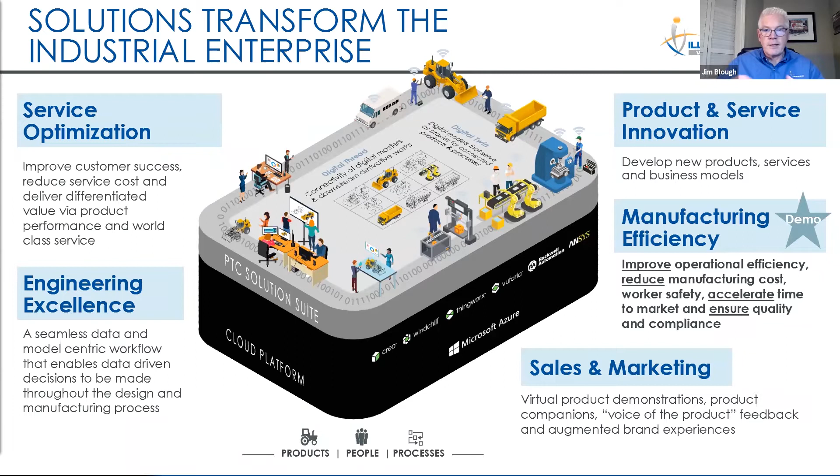So if we look in today's environment, whether it be in a factory, a lab, or a facility, we have some common challenges. On the data side, right, we lack the visibility of operational information or machine data. I don't have that available to me, and I can't really see it. And sometimes it's because machines aren't connected, or if they are, I can't share it. Which leads me to the next point, is that I don't have the ability to aggregate it. Thus, I can't analyze it. I can't visualize that information.

And because of that, reports delivered to organizations are typically looking backwards. They're delivered after the fact. I don't look ahead and see what things I can do for my environment. Looking ahead, what I do is look a lot of times at what has occurred in the past.

I have challenges from an infrastructure and IT standpoint. I have a lack of interoperability. This concept of having all these different systems and different pieces of equipment, and they don't work together. They stand very specific, very rigid. So I may have an application or system on my plant floor that doesn't communicate to my ERP system.

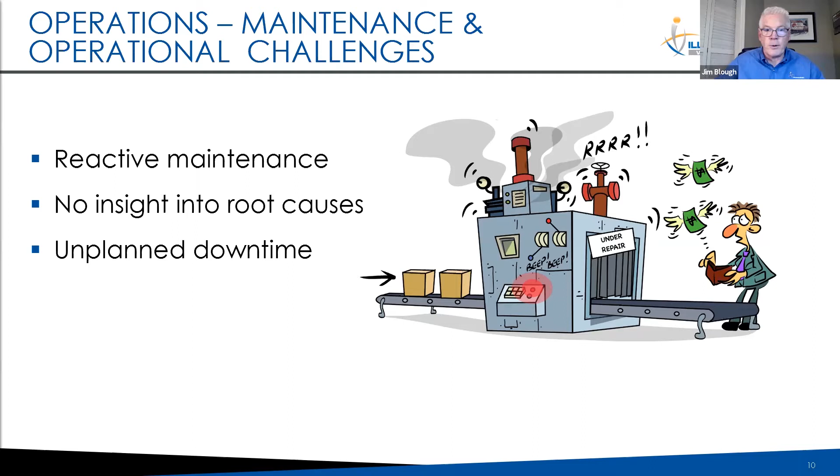So for Illumination Works, what we leverage as part of this was the IoT platform ThingWorx. This is from PTC, one of the leaders in this space out of Boston, Massachusetts. If we look at what ThingWorx can deliver, it's purpose built. It is built for an IoT environment. It has things you would want to have: connectivity, scalability, security. And then it allows for rapid deployment, rapid development, and extendability.

The idea is I can get something to value quickly. I can also go across all environments, whether that be on premises, in the cloud, or a hybrid of that. I also can provide a very engaging experience.

So this is where I can take, whether it be a dashboard that's presented to me, or I can extend that with an augmented reality experience. And then it exists in a vibrant ecosystem, with a lot of partners we work with and existing different systems. So the chances are there's some commonality between the systems in your organization and the support that ThingWorx can provide.

So what makes up ThingWorx and what are the parts we use today? From a connectivity standpoint, we look at Kepware, and you'll see John show us how that works and how we connected our factory. We then leverage a concept of a thing model. This is a tool to build really my IoT application.

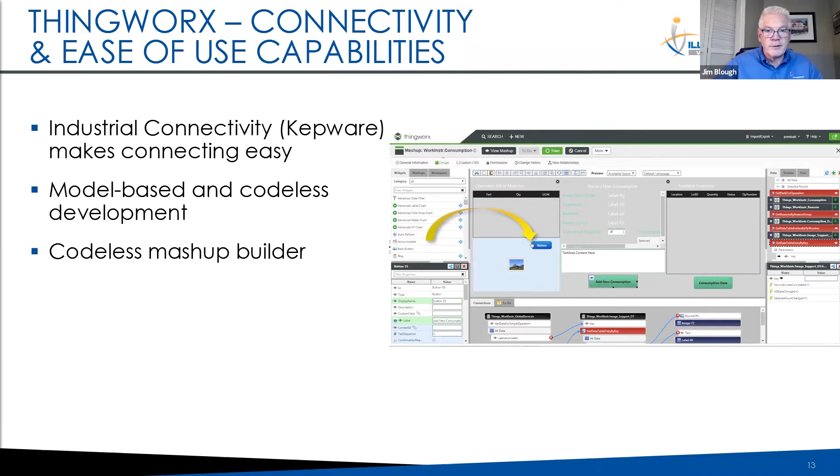I can also easily write rules and generate alerts that I can put as part of my application. And then lastly, from an infrastructure standpoint, I can integrate with systems, whether they be business systems, whether they be systems within a factory, and web services. So the idea is it easily integrates.

It provides a very unified view of various sources. So you're going to see all of these sources, and we can present that as part of each of our demos in a very unified fashion.

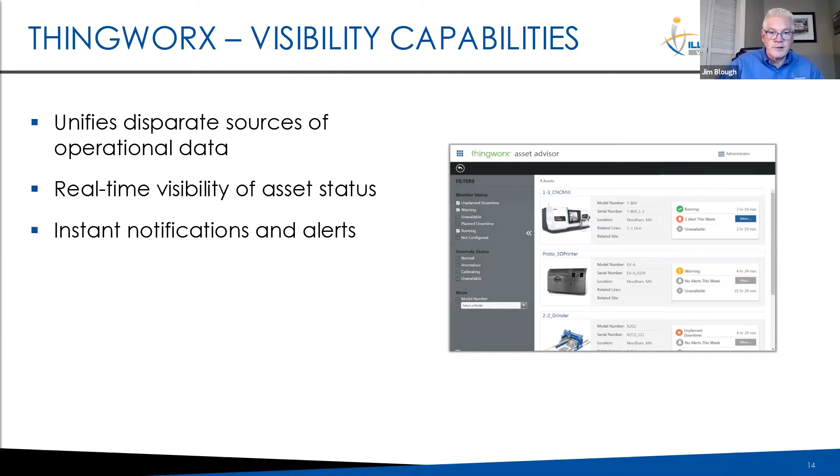And then being real time, you'll see both John and Stefan show the capability of real-time monitoring of the different assets that are available. So I can now start making timely decisions, and I can also look ahead. I also can, accompanied with that, get instant notifications of alerts. So if something is wrong, I will know now. I'm not going to know 10 minutes later, et cetera.

And you'll see, actually when Stefan does the paint hanger demo, he has different icons that come up and indicate if something is out of range in some of the different measurements that are occurring.

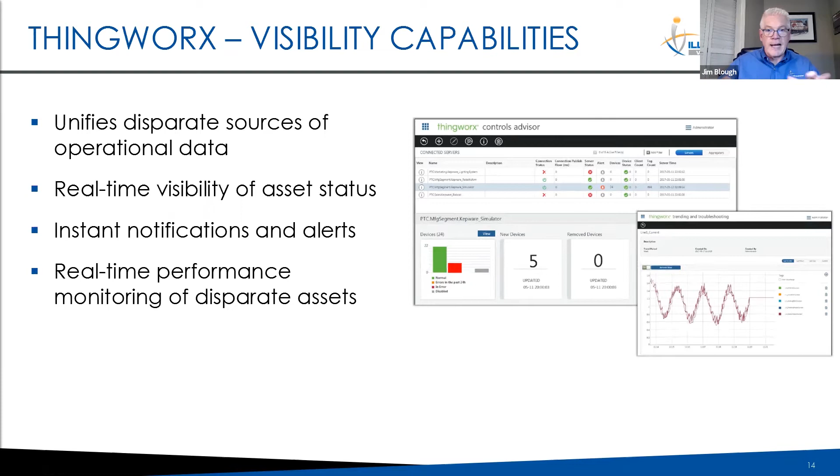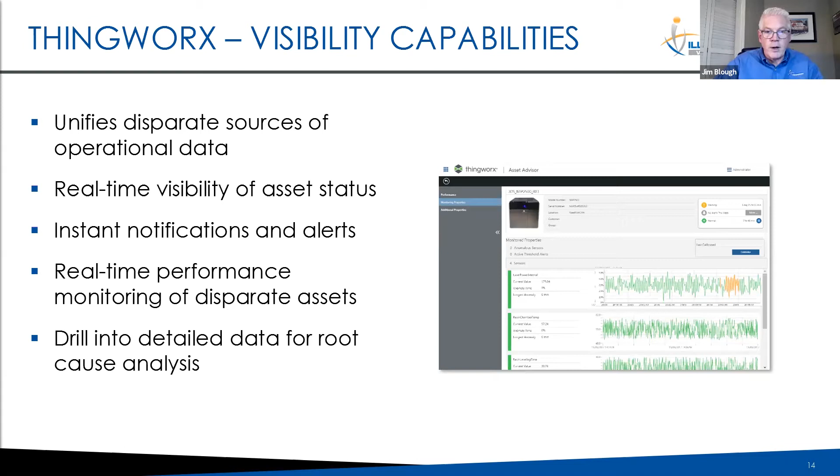I can provide and display that information in real time. I have all of the different assets, and you'll see in both demos a dashboard that has all that information available on a real-time basis. I also have the capability of drilling down, and John will show us that in the first demo especially, where I can drill down to determine the root cause of a problem or get more detail on what's going on within my operations.

From a development standpoint, ThingWorx is really made to develop faster and get quick time to value. Instead of having to develop it yourself using tools available in the industry today, this is really going to accelerate your development cycle.

As I mentioned before, we can create browser-based desktop and also mobile solutions. In our case, we're going to show 2 dashboards, but in the future we could extend that out by showing it on a phone or a tablet.

And I'll also be able to, because I now have the capability of looking at data real time across everything, start doing data analytics that allows me to do predictive and prescriptive type of analytics. We aren't going to show that today, but as we continue to grow these 2 scenarios, you're going to see some done in the analytics space.

And then finally, as I mentioned before, I have the capability with augmented reality, AR, to really integrate that. As you can imagine, it's trying to take what we've done and created and being able to view that in a very interactive type of experience. That's something we're going to be looking to add to our 2 demos in the near future.

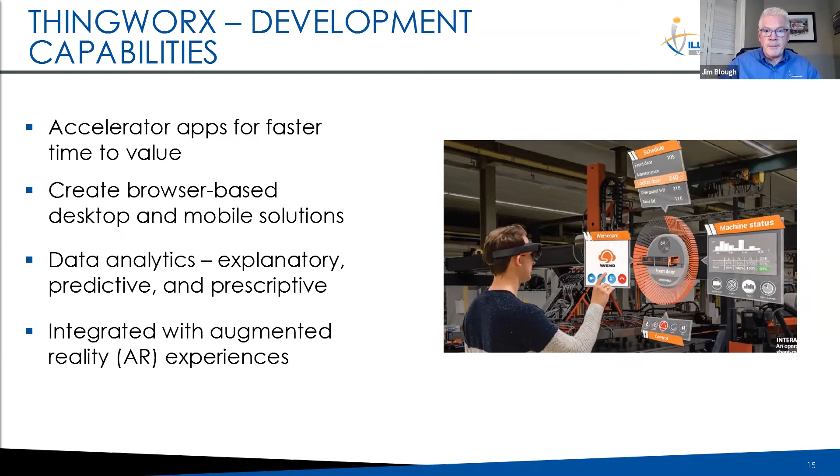So what is the value that's really delivered? We've touched on some of these, but let's summarize again. Proactive issue identification—I can do that. I'm not looking backwards, I'm looking forward.

I have more reliable data collection, so everything is brought into one place. I don't have multiple screens, I don't have information that I have to run over and look at on different systems. It's all collected in one central location. Thus I get increased efficiency, increased flexibility within the environment. With all of these connected devices, being able to view them and manage them in one location is very valuable to your organization.

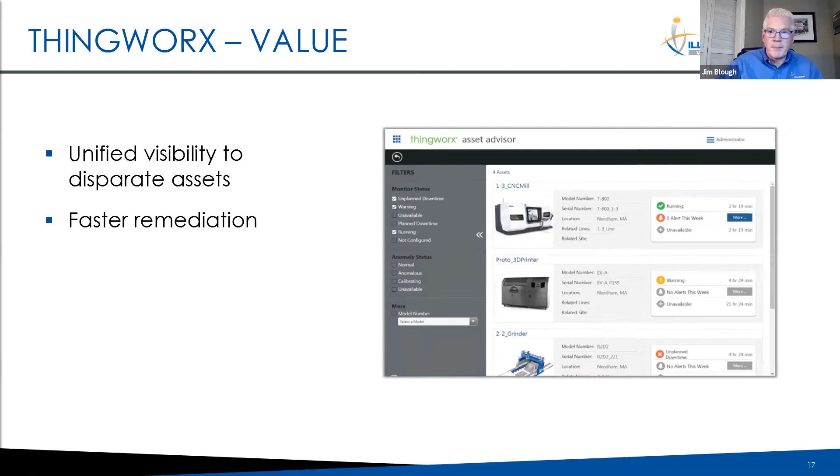As I continue to look at the value, there's unified visibility—I can see everything at one spot, and you'll see in both demos how that plays out. Faster remediation—I can look at it real time, then make my action quickly and effectively. And thus I reduce downtime, which is a key piece.

So if we bring these all together, this ties it all together—what does ThingWorx bring? It increases the efficiency, increases your responsiveness, improves the quality of your environment, and maximizes uptime of your pieces of equipment.

So we step back and look at the overall picture—what does an IoT platform like ThingWorx deliver to your organization? This maximizes revenue, or maximizes the capital you're going to spend on a piece of equipment or the environment.

How can I improve throughput, increase service levels, reduce cost? How can I lower labor costs? How can I reduce downtime? How can I make it more effective? Also, how can I provide a safe and compliant environment for the workers in my organization? And then increased efficiency—how can I improve the asset utilization for my company?

Both of these, which we're going to go through today, come out of our innovation lab. Our innovation lab is at Illumination's headquarters in Dayton, Ohio. The lab is really about taking the latest technologies, the leading tools available in the industry, and exploiting those to become more knowledgeable—for us and for our consultants—and then delivering solutions to our clients. Lately, the real focus for our company has been on AR, IoT, and data science, and we continue to grow those practices.

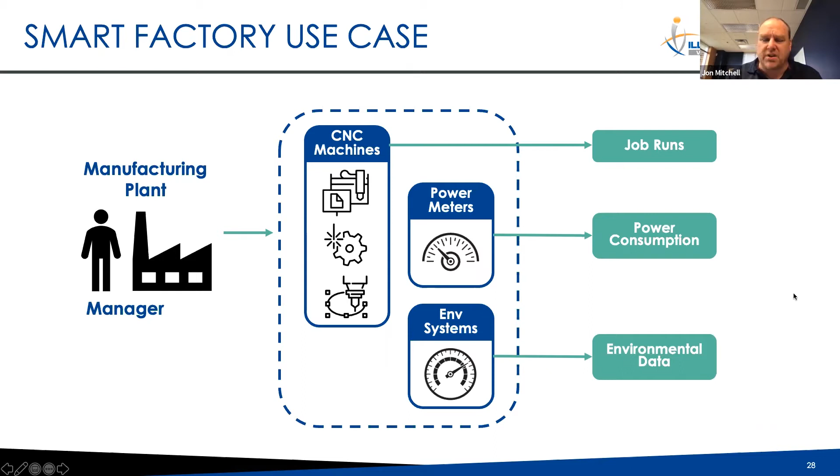In this particular example, we have a working micro HVAC system that we'll show in a little bit. But we really wanted to make this as realistic as possible. So with that, I'm going to flip over to the demo.

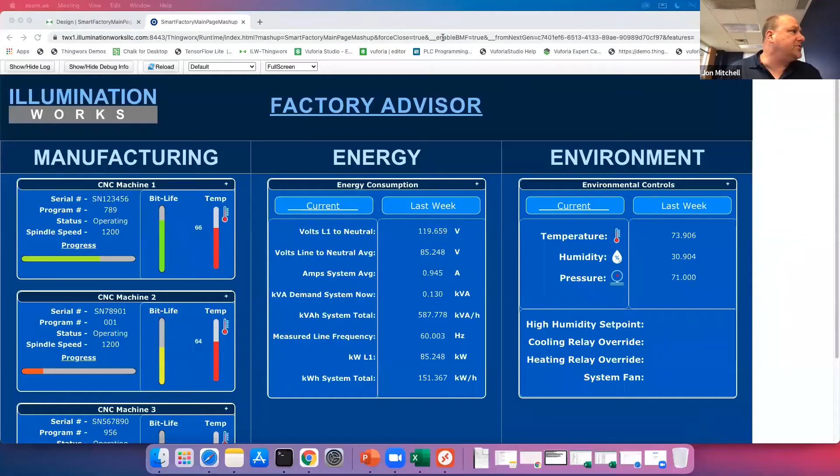Everybody see my web page okay here? Factory Advisor, Jim? Yeah, it looks good. Okay, yep, got it. So let me make sure I'm still logged in, not timed out.

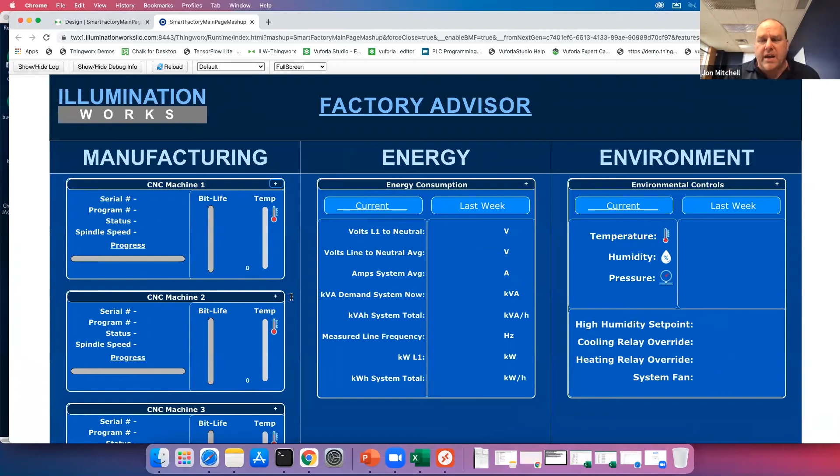There we go. So as this pulls up, from a design perspective, you can see, and this is our main entry point from an application perspective, we really have those three pillars or groupings of information. We have our manufacturing sector, and in here we have a number of micro pieces of CNC data, and these are your high points. These are your things that if I glance at this dashboard, what do I want to see?

So I'm looking at things like status. I'm looking at the program number. I care about the operating temperature. And then I've got this bit life indicator that is showing me the current tool loaded, what kind of expected life does it have. And then across this bottom here, I have progress bars.

In my center level, I have my energy consumption. So what am I currently doing? Obviously, pulling less than an amp here. We're not dealing with a lot of energy consumption, but these are live feeds coming off of a Dent Power Scout in our lab. So we're able to pull that data dynamically in and present that to you as a live feed.

We also have the ability to drill into trend information. So we have last week's data. So you're seeing a couple different points here. And I have the ability to really have these live graphs, although a little bit hard to read here. You're looking at timestamps. You're looking at the different data points that we're pulling off and we're passing through the system and pulling on there.

So eventually I could build a drill in. If I want to look at that particular data point at that particular time, I can make that active. For now, we're just showing it as a trend line, a time series line, so we can gauge some of those things. And from a high level visibility perspective, look at that.

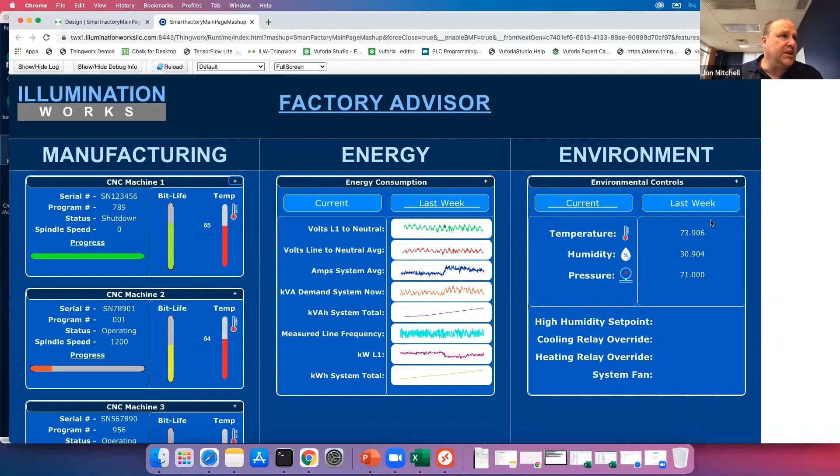We also have trend information. And as you can see, as we've cooled off here the last couple of days in Dayton, our humidity has dropped from a high point just a couple of days ago when we had a big storm come through. So for me, it's great to see that the demonstrations that we're doing are reflective in the environmental controls, which is something that you can influence.

But once again, same kind of construct. What is my push over time? How am I viewing that? We also have the ability to drill into more detailed pieces, and we're going to start on the environmental side.

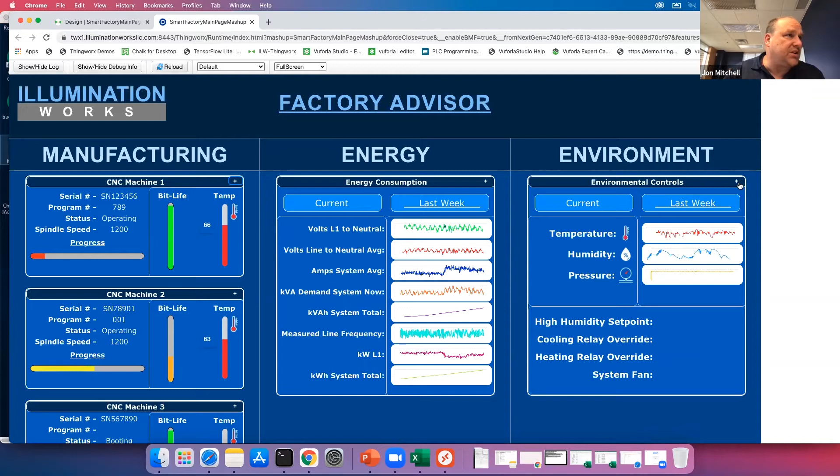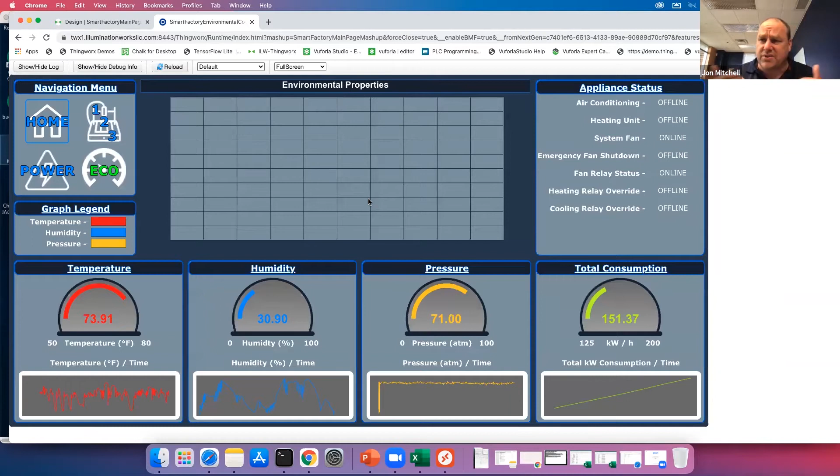So I'm going to open up this page, and this is going to be my drill-in. This is going to give me a lot more detail. This is going to give me a better visualize or an in-depth visualization of that. I also have things that drive my environment.

I have different statuses of different pieces of equipment. In this piece, I have the system fan, or for us, it's a ventilation activity. The fan is on, and that's because the relay is on. So I'm providing power to it, and I'm measuring that, yes, I'm actually turning, I'm getting RPMs.

So I also have the same kind of trend line over the last couple of days. As you can see, the humidity line is the one that kind of moves the most across the lab environment that we have. Up here, as you can see, we've moved to kind of this drill-in piece.

So I have some navigation that we've created. And the key thing to think about and take away is it's really flexible in terms of what you want this to look like, as plain vanilla or as branded or as colored as you want. We chose colors that we thought made sense.

And so, as we put this together, it looks like this, but it very easily could have a different look and feel.

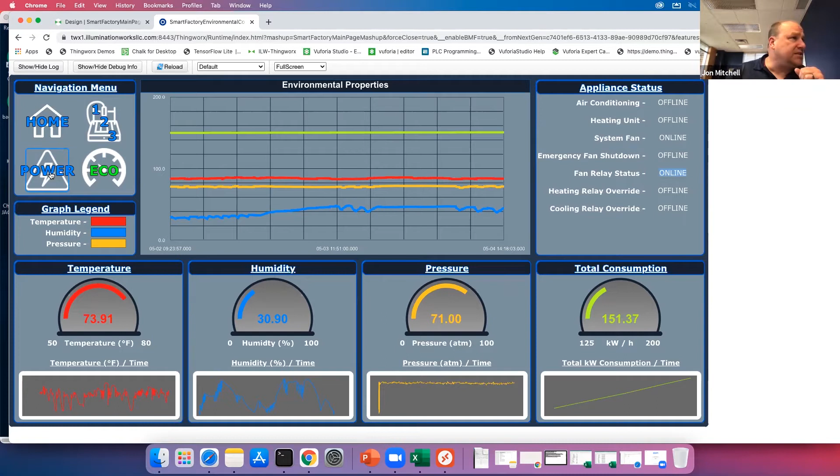So if I go into the power view, I see the different power systems. I have graph legend activity, this energy consumption graph. Take a second to load there. And these are pretty steady.

The system kind of just runs and turns on, so it's not overly exciting to look at this graph. But we do have some variances in amperage and some highs and lows in volts as different pieces of equipment are turned on and turned off, because the HVAC system is live. So as temperature thresholds are reached, we're actually spinning up heater controls and cooling systems to adjust that.

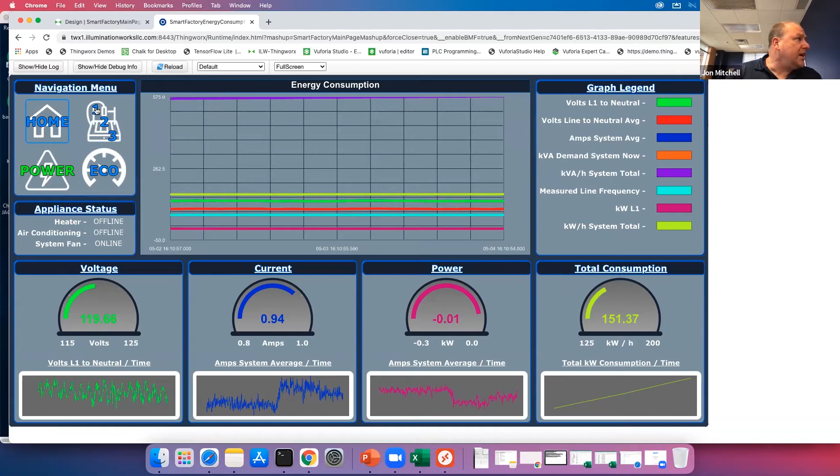From there, I'm going to start drilling into my manufacturing activity. And I could get to this page from that home page as well with those little plus boxes. But I'm going to be drilling into what is a simulated, specific job run. So same menu up here.

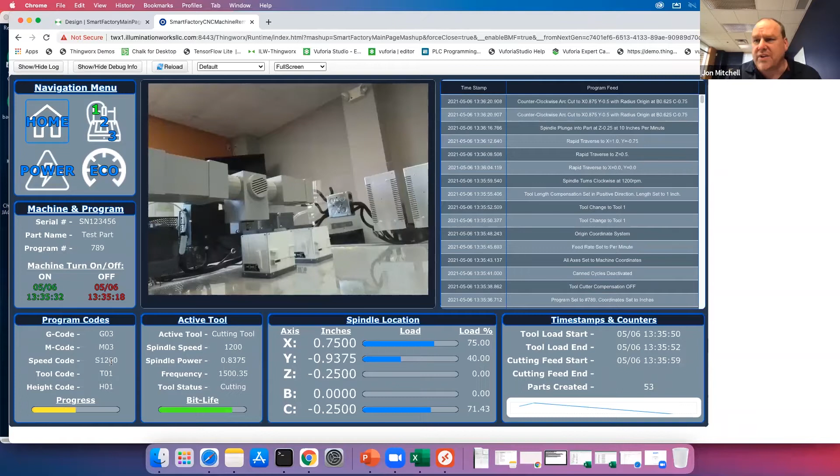I have general machine information. I'm looking at what is the program code. What are we trying to tell this machine to do? While this image right here is a video feed from just an overlook into our enclosure, what we're trying to simulate here or show is really any live stream video, live stream image.

We can integrate that data as well. So if I had a video camera, a LiDAR camera, or something else that's looking at a 3D print job, or any kind of feed, I could incorporate that visualization into my mashup, which is a UI in ThingWorx, and pull that data together.

Once again, same status locations, spindle locations. Some of these are graphic adaptions that we've done more from a visual perspective. An indicator line is typically a good way to show lifespan or lack thereof.

And then the other thing you're going to notice here in this top bucket, as the job runs, we're getting those status notices. So I'm getting a live feed from this simulation machine. And as I get those live updates into ThingWorx, I'm able to push those directly onto the user interface.

And we can drill into really any one of these machines. The video feed is going to be the same, but your program data in terms of what it's specifically doing are all going to be different.

So with that, that's the end of the demo. And the next piece, we're really going to talk about what we built, how we built it, and a little bit of the why we did some of the things we did. So I'm going to flip back over to my PowerPoint.

And go from there. So as we set back, we defined our use case. We looked at this and said, we have an understanding of the domain. We have an understanding of who our actors are. We have a general understanding of what kind of data we would be getting and seeing.

What are my building blocks? And so with ThingWorx, there are a set of pre-built applications. A factory advisor could be considered one of those pre-built configurable. There's a number that you can get directly from PTC or other partners, but they really are starting points for being able to configure or customize your own capability.

You can also start from scratch, which really speaks to the flexibility of the tool set. My use case may be something completely different, and the ability to rapidly build that user interface, which we'll show you here in a little bit, is really one of the big strengths of the platform.

We wanted to highlight connectors, and by connectors, we're really talking about what all kinds of ways can I access data, and ultimately every one of them being access data securely. But maybe I'm accessing control systems. Maybe I'm accessing an embedded system. Maybe I need to connect to a database because it's got information that I care about in the context of other information. And the ability to pull all that data together in a single location through all these connectors is another strength.

I'm going to create a model, and I'm going to create a model based on the business or the operation that I'm doing. So in our construct, I have a thing called a CNC machine. And that is an object or a thing in the model, and I'm going to associate all the data to that model. And what that allows us to do is make it very simple and easy to understand not only the data we're collecting, but how it's organized. We're going to apply business logic.

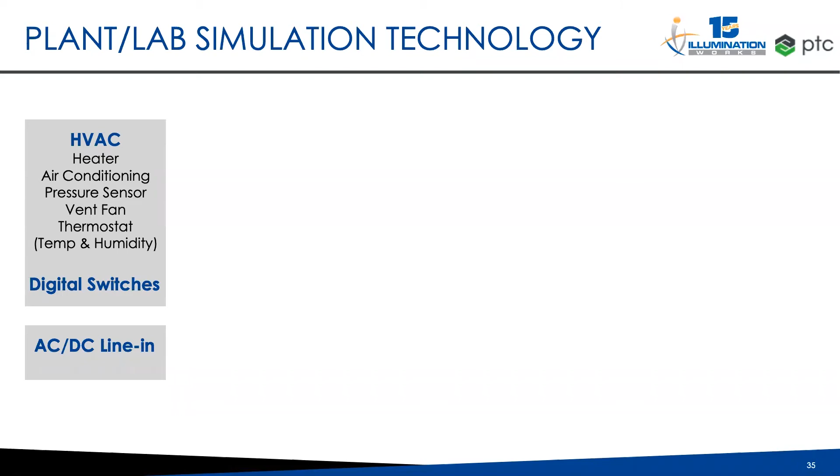For each one of these, this is our controls network. We have a WEB-RL6N, a room controller made by Honeywell, which is the brains of monitoring and managing and turning on all these different pieces for that HVAC system, and that digital switch controls. We also have a Dent Power Scout that we use for measuring our power consumption.

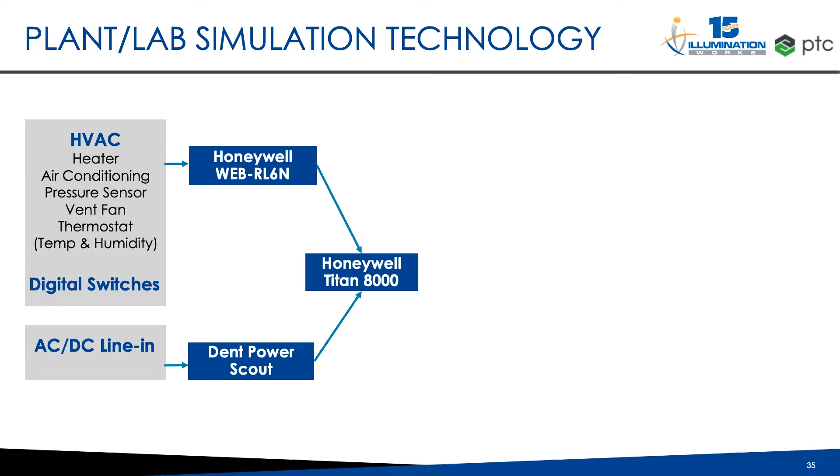Both of those are talking to a server, a Honeywell Titan 8000. Think of this as more of a building level controller. Many different things can be connected to it in series so we can use it as a consolidation point. We're pulling all of our data only from the Titan, so each of these two devices below it sends data to that server, and the server is exposing that to us, to Kepware.

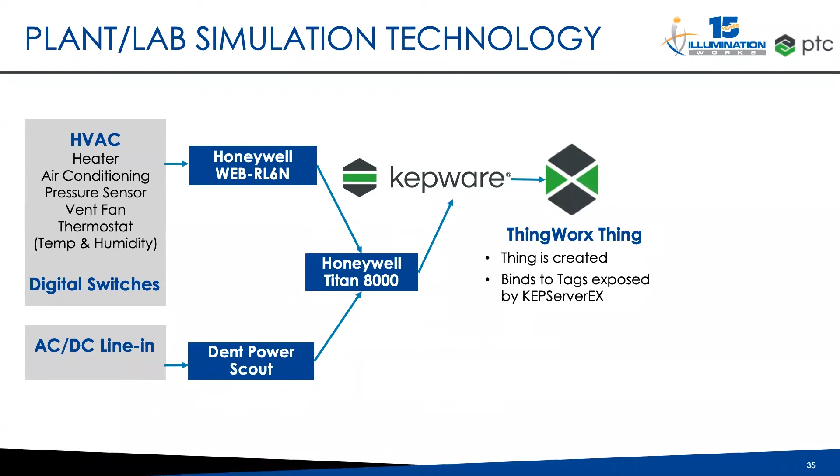From there, we have a live connection into ThingWorx, and we're mapping that data. There's an endpoint in ThingWorx where we're recording that information, and from there, that's where we're creating our domain model and then building our user interface.

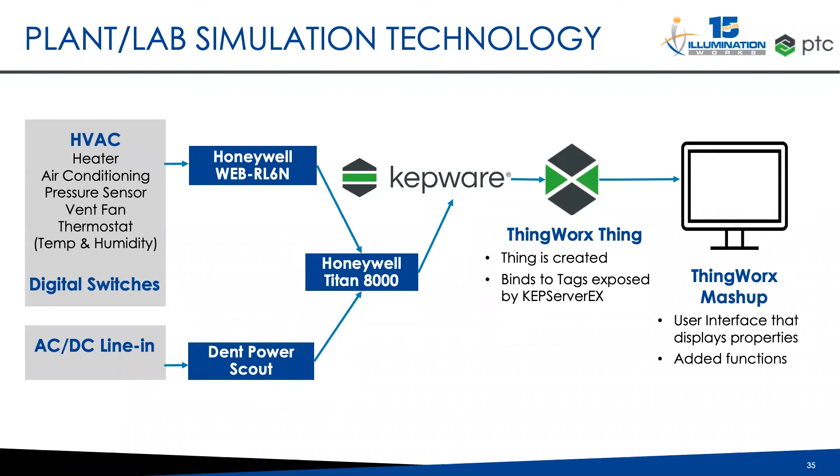CNC Machine Simulation went a little bit left field. We're using microprocessors since we physically don't have the power or the space to have a CNC machine here in the office. So the next best thing is our ability to simulate that data based on sample data we were able to acquire, and generate scripts to allow us to test our hypotheses and our code.

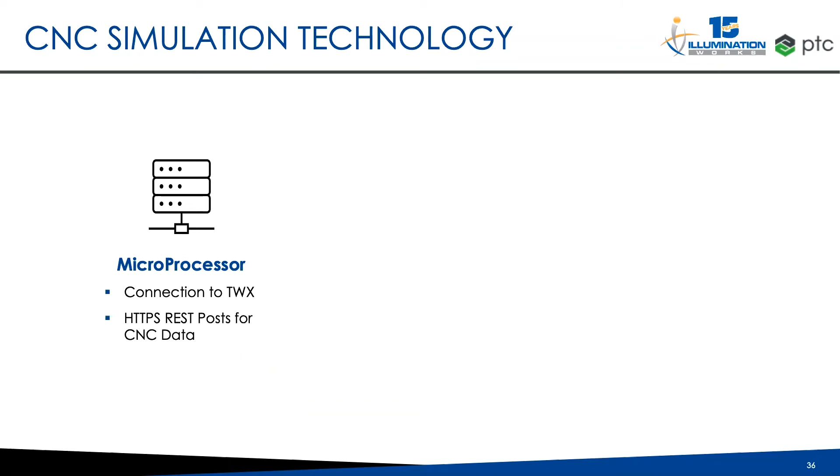So we have a semi-dynamic connection to ThingWorx. We're doing secure HTTPS REST posts. The scripts we're running are actually generating information and then sending them to ThingWorx, which we have mapped to a thing, which I'll show you here in a little bit. That same thing can then be pulled into our mashup, so I'm getting microprocessor data and sensor data all into that same user interface.

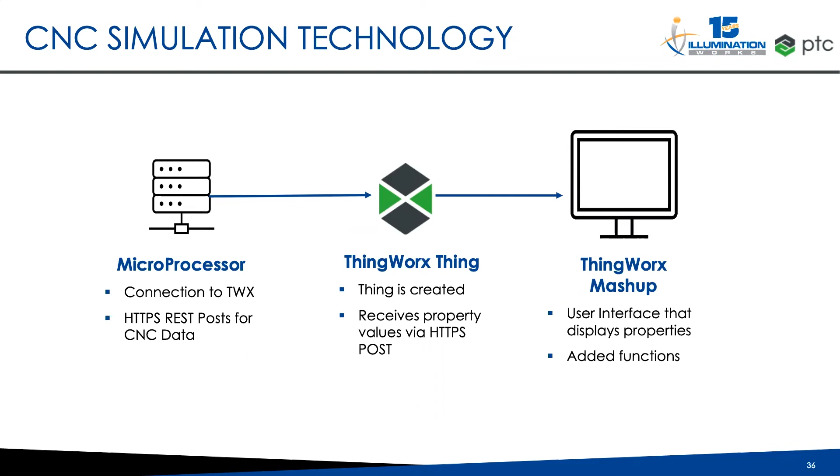So we're going to do a smart factory walkthrough in terms of the weeds. We've got a quick video overview. We'll talk about the Honeywell interface - what it looks like, and the different piece parts we used to build this. We're going to talk about the Kepware setup, what I had to do to connect those controls to Kepware. We're going to talk about the ThingWorx connections, how I'm getting data there from Kepware, the process to define things or build our domain model, and then a snippet of the user interface build activity from a drag and drop perspective.

So I'm going to show this video.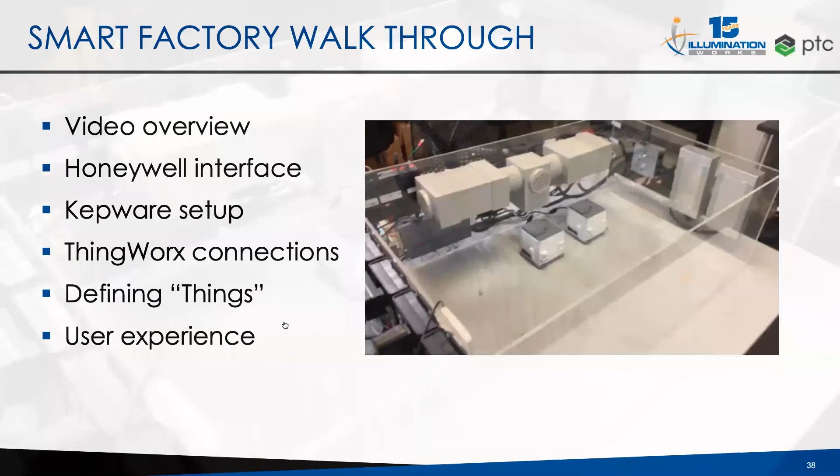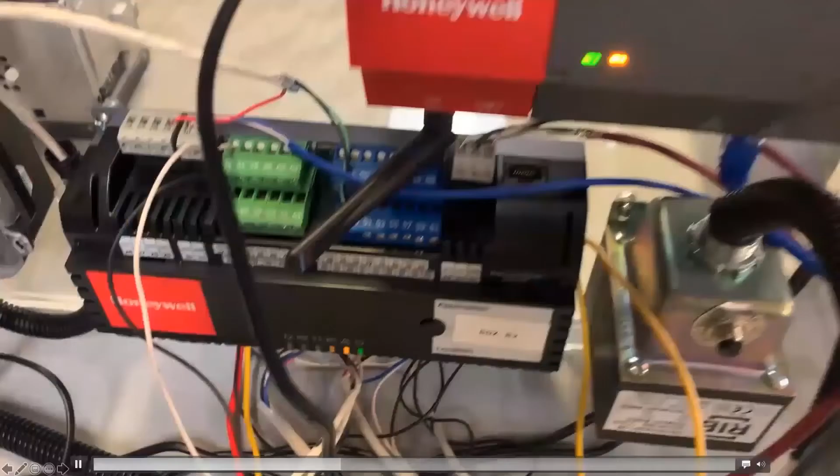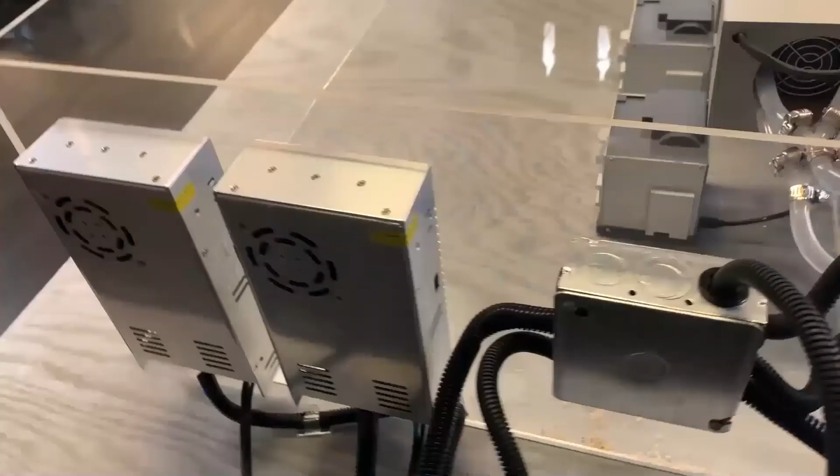So here we have our digital switches, our power relay, or excuse me, our power consumption monitor, our Honeywell Titan, and WebRLN room controller. As you can see, we're running BACnet with different sensor pieces - that's a pressure sensor, some relays, our heat dissipation for our cooling system, and then our cute little 3D printed microprocessor CNC models, running live data in a couple rooms over from me now.

So with that, I'm going to flip over to an interface and log into my Honeywell system. There we go. So this is the web interface for our Honeywell system, and I'm logged into that Titan 8000.

So if I open up this box 2, which is going to be the brains of our HVAC system, this is the visualization that I'm able to get access to. This was built a number of months ago, but I have all of my data points that I'm collecting being pulled into this single interface. I have my sensor information - humidity, temperature, pressure information. I have statuses of various relays, whether they're on or off. I have the ability to interact with my system, so set things like set points for temperature, set points for alerts.

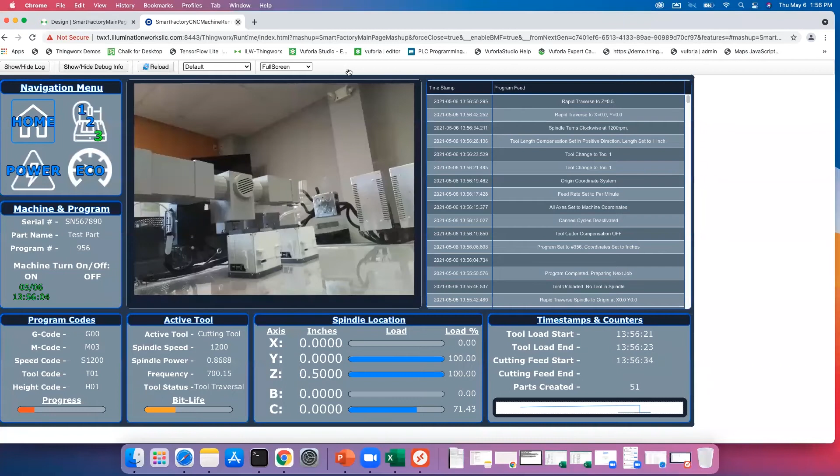Too many programs. All right, so this is my Composer interface. I'm going to pull up this industrial connection, which, if I go into browse, shows these industrial connections.

We've done some various piece parts. But if I go into my different properties and go into Discover, what I'm going to see here is, as Kepware starts throwing data, this is all the data that Kepware is sending. And as you can see, under that same structure of that project, those two boxes, I have this tag, Input 1, and all these properties that are being stubbed at it.

So this is our entry point. We're going to be storing this information as that central collection. And then from here, this is where we start to build our business model. So I need to start understanding my domain -- in this case, the controls information. So how do I do that?

Very easily, I'm going to start selecting properties that I care about. We're just going to do a couple here: the value, the name, the description. And I'm going to click this button, and I'm able to say what kind of template I want to use -- in this case, a remote thing. We've got a connection to that remote thing because we have a live connection. And this is going to be 'test web humidity.' I'm going to save.

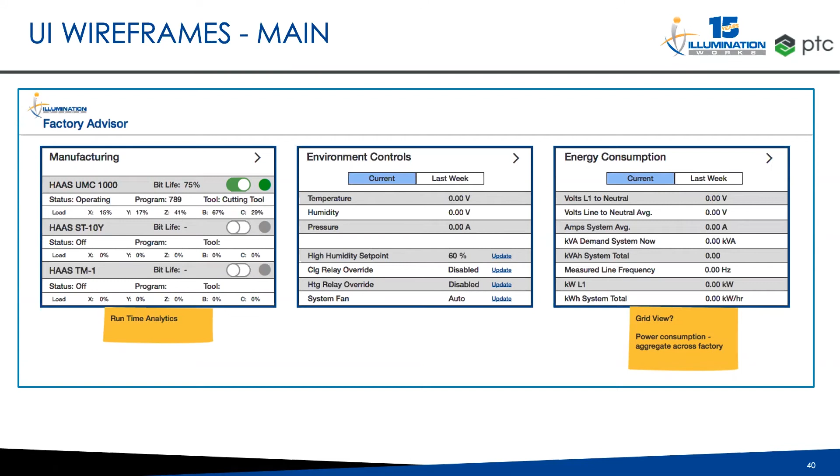From a detailed perspective, again, I think this is a simulation of a 3D print job, but I have these main blocks. This is how my layout needs to look. This is the information that I want to see come into these particular parts, or the way that I want to highlight that to the people that are going to be using that. So that's the general process that we walk through to build our user interface.

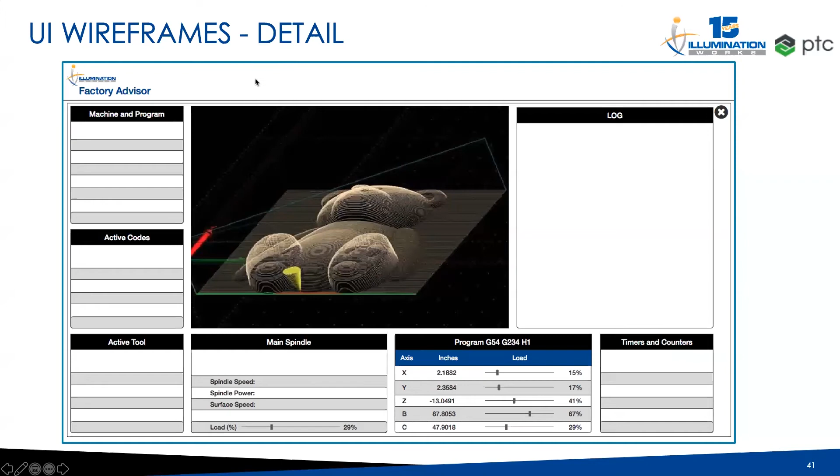So if I go over to our smart factory main page, there's a lot going on here. There's a lot of different things, but what we're going to do really quick is build a simple one to show you how easy it is to build a mashup. So we're going to build a new mashup.

We're going to make it a responsive one that allows me to flow data back and forth. I'm going to make it simple, but quite honestly, it's going to look exactly like our interface that we have - a header, footer, and a top panel. So once again, haven't written a cent of code.

This is test web mashup. I've got some parameters I can use there. I'm going to quickly go into design mode, and this is going to be my canvas. So from a drag and drop perspective, in this center pane, I want to change my layout - maybe I want my 3 panels. So I click this button 3 times, and now I have a manufacturing panel, a power panel, and an environmental panel.

I want to add some labels to this so that I can describe what I'm doing. Drag that over, change some parameters. And this is factory advisor. So once again, no code, have a user interface.

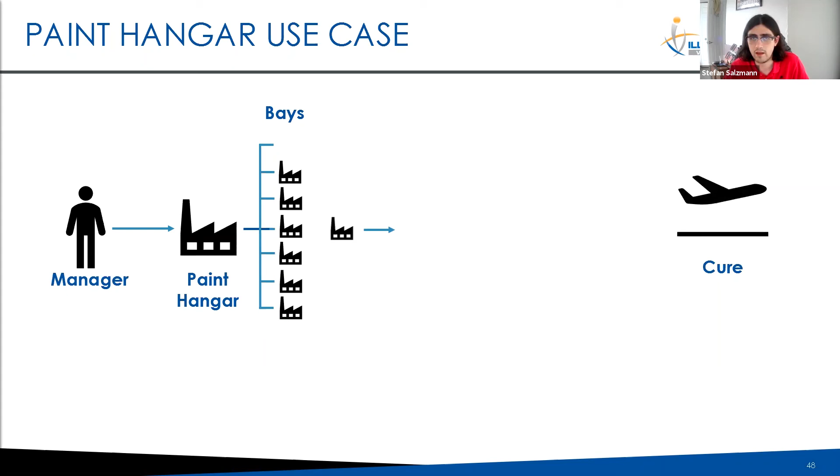Now that I've outlined the use case, I'll describe our interactions with the client when creating this paint hangar dashboard. We first talked to experts at the Air Force about some issues regarding their data. One issue was data availability, since they have multiple paint hangars throughout the country, and they can only see information locally. They can't see information from other paint hangars if they're not there, so they needed a single consolidated view for everything so they could provide predictive maintenance on that data.

At ILW, we began by creating wireframes, which is just conceptualized UI design. We designed the flow from screen to screen based on what exactly they would want to see and what data is most important to them, and we completely customized those around the customer's needs. Throughout this process, every couple of weeks, we would go back and talk to the experts to make sure we were on the right track and that what we'd provide in the future with the actual UI was something we were shooting for.

After all the wireframes were complete, we began designing the user interface using the ThingWorx Mashup tool. We added functions based on user needs and displayed the data in a way that was best for them. Again, we would go back every couple of weeks to make sure we were on the right track and that what we were showing them was what they wanted.

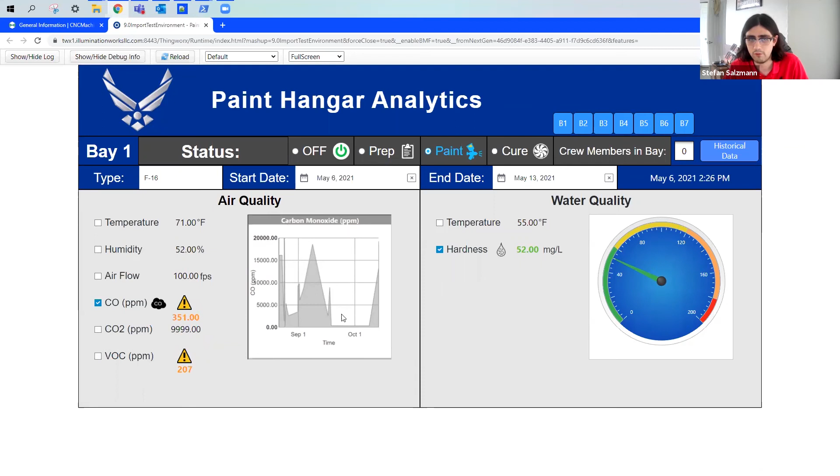I can go ahead and enter the cure mode once the paint portion of the project has been completed. On the right, since the spray painting guns aren't being used anymore, we don't need to measure those properties. But on the left, like I mentioned earlier, we're still needing to measure these hazardous chemicals to make sure they're dissipating at a safe level. Those are displayed throughout the paint and cure process.

Now that I've shown you how the Paint Hangar dashboard works, I'll go ahead and describe the technology we used and how to build it, and provide simulated data inside of here, much like the data was changing on the properties.

In order to get all of that hooked up, we first started with the Edge microserver. The Edge microserver is a series of files provided by PTC that allows us to connect to ThingWorx, as well as making the connection available for the Lua Script Resource, or LSR. The LSR allows us to identify a thing and create it, as well as give it dynamic data changes throughout the whole time the script runs.

Once the Edge microserver and the Lua Script Resource are both running correctly, we can go inside ThingWorx and create a thing. Inside that thing, like John showed you earlier, all those properties are received, and the data being received is posted from the Lua Script Resource. After that, we can take those data points and put them into context inside the user interface, or that dashboard I showed you earlier, inside the ThingWorx mashup tool.

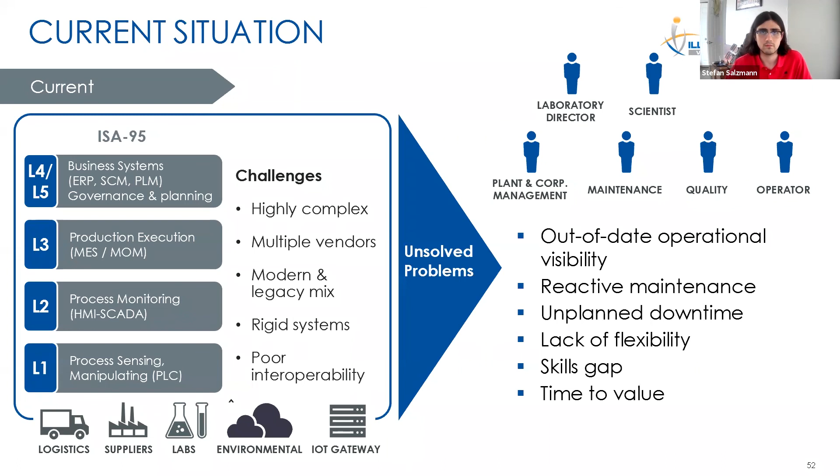Thank you, Stefan. I hope everyone found both those demonstrations and the exercise as interesting as I did. As John mentioned up front, we focused on a couple of different scenarios, but those can be extrapolated to many other use cases.

So as we wrap up everything we've heard today, and really the value of connecting sensors in your organization, we want to take first a snapshot of what things look like currently in many environments with sensors that aren't connected. We have systems of different levels, from the low level of just sensing a process in a PLC level with the piece of equipment, through process monitoring like a SCADA system, and then into production execution.

And if it was manufacturing, we'd be looking at a manufacturing execution system, and or up into our business systems, whether those be everything from your planning organization, from ERP or any other type. So we look at those different levels. The challenges we have are that it's highly complex, multiple vendors are involved, and we've got a mix of technology, both modern and legacy.

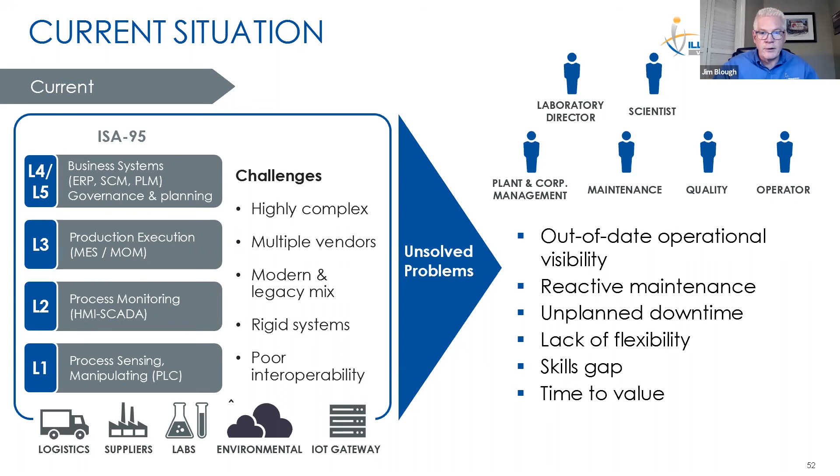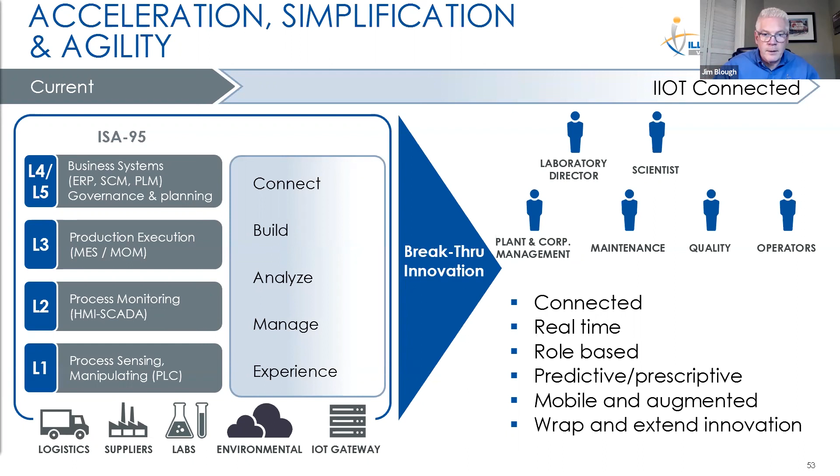So again, if we see what an IoT solution, this platform like ThingWorx can deliver to us, we maximize the revenue, we minimize what I'm spending because I improve my throughput. I reduce time because I can now develop things quickly. As you saw in both cases, we were able to quickly put together and pretty straightforward develop an IoT application that could be used. We reduce costs as a result because we're increasing productivity, we're lowering costs, we're increasing the efficiency of our environment, and then we improve quality.

We can accelerate the security and the scalability of innovation, of products, services, and really operations. And we can do this across all different types of environments. So we thank you. Let's see what additional questions we may have that have come up since then.